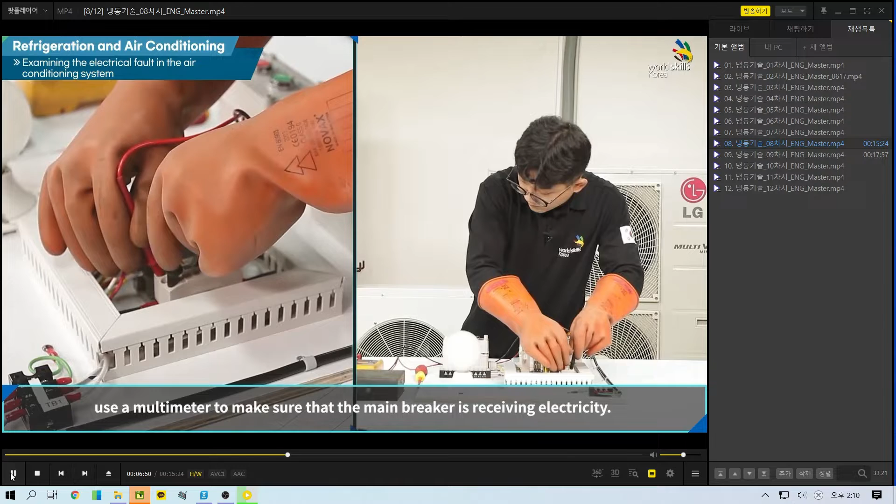Check if there's any electrical leakage at the inner part of the circuit and if ground connection is properly conducted. After confirming the electricity is flowing into the circuit, turn on the switch to examine how the circuit is operating. Due to the electrical flow inside the circuit, the equipment must be checked with rubber insulation gloves for the safety of the operator.

Check whether the power and operation lamps properly work and the light bulb for loading on behalf of the motor is operating normally.

The process of finding and repairing the fault: disconnect the power from the main electrical circuit and cut the wires intentionally to open the circuit, causing a failure. At the part where the worker has just cut the wires, the failure is caused by disconnecting the wire that is connected to the magnetic switch.

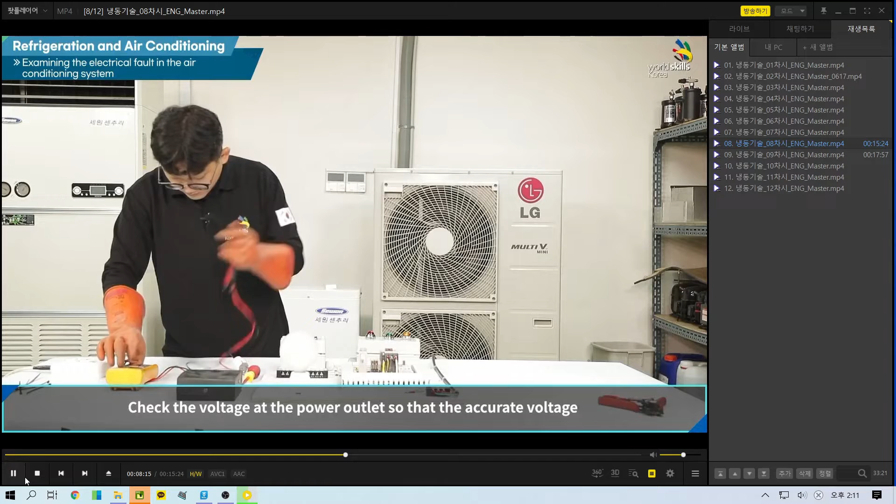To check if there occurs any fault in the machine, supply power to it again. When connecting the power, you must wear rubber insulated gloves and should conduct the power voltage test. Measure the voltage at the power outlet so that the accurate voltage can be supplied to the 220-volt line and 0-volt line on the diagram.

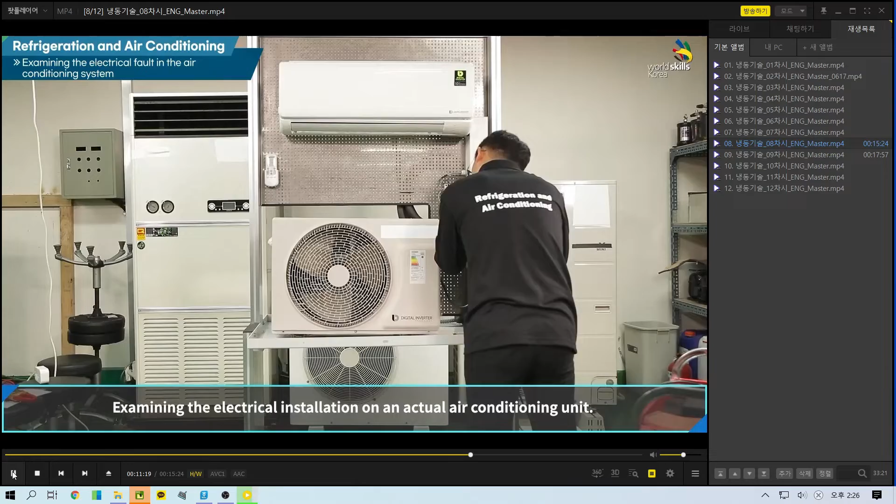For workers' safety, attach safety signs to the circuit breaker, power outlet, and other equipment to prevent outsiders from operating them randomly.

To check the diagram and the wiring of the air conditioning unit, disassemble some covers of the outdoor and indoor unit.

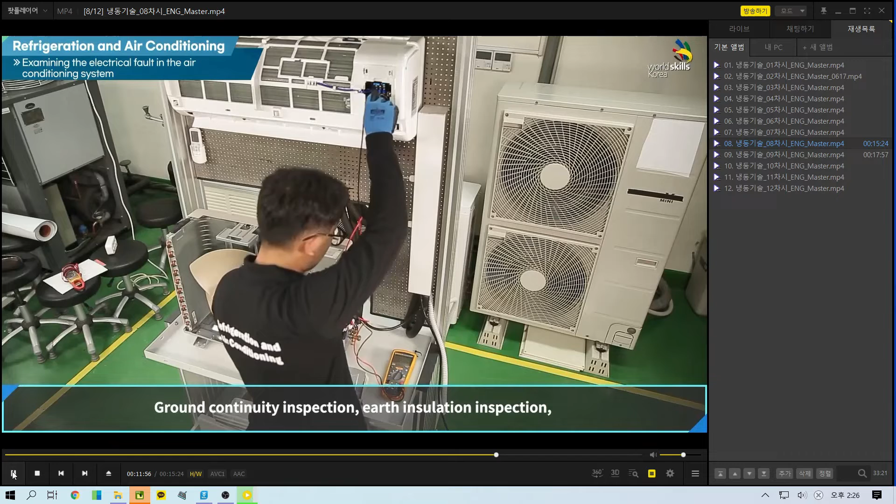Using a digital multimeter, conduct the continuity test on terminal L and N. Ground continuity inspection, earth insulation inspection, and interline insulation between L and N phases are conducted sequentially.

If the resistance value between the two terminals is abnormal, it can cause fire due to circuit breaker trip damage and electrical components breakage or sparks. Therefore, check for any problems before supplying power.

The actual air conditioning unit consists of an outdoor and indoor unit, so there is also a communication wire connecting the two. Be sure to inspect not only the main wire of the machine, but also the communication wire.

The refrigeration unit usually consists of several basic control circuits that are operated by their own sequence, which operates following the whole sequence again.

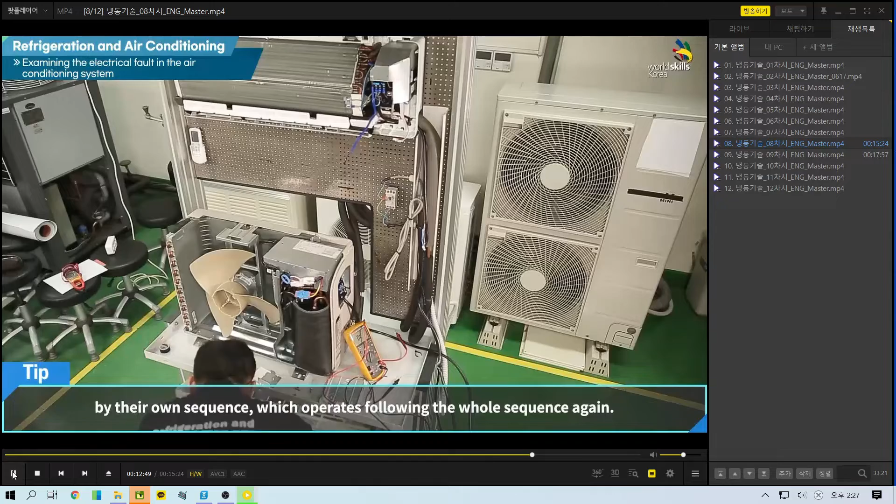What is a sequential control? It is a control system which proceeds step by step according to a set sequence. If power is supplied with a switch, it operates the load according to the conditions of the auxiliary relay in the circuit or the switch.

If the circuit test is completed, put the covers on the machine again and supply power.

Control systems for refrigeration systems and air conditioners are divided into main and auxiliary circuits. If you conduct the design and wiring by distinguishing each circuit part and control part, they can easily find the fault when the control system of the refrigeration unit has any problem, and accurately conduct the repair by exchanging proper components. The actual wiring diagram might use a different operation method and components depending on the designer's intention and purpose. So be sure to understand the control system by checking the wiring diagram provided by the manufacturer.

Before supplying power, make sure to conduct the power voltage test so that the accurate voltage can be provided.

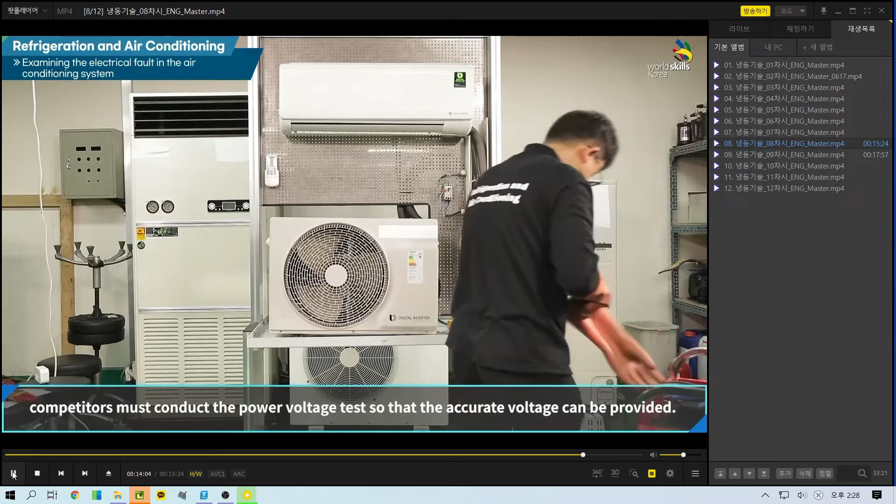Connect the power to the air conditioning unit and operate it to check if it works without any problems.

Main focus of the task in this training is as follows. First, to reduce errors in data, examine the problem with several trials instead of finishing it with a single trial. Second, testing instruments such as digital thermometer must measure the same points during both normal operation and fault finding. Third, when measuring wind speed, it is necessary to measure the wind volume at several places as much as possible, rather than only one place, and to make an average value.

Fourth, when installing a manifold gauge, install it where the refrigerant in the hose can be reclaimed. Fifth, after the repair is completed, competitors should always check if the machine operates properly. Sixth, to figure out the reason for the fault, it is necessary to train workers by comparing the normal refrigeration cycle and the refrigeration cycle which has a mechanical fault. Please check the preparations and tools for this training.

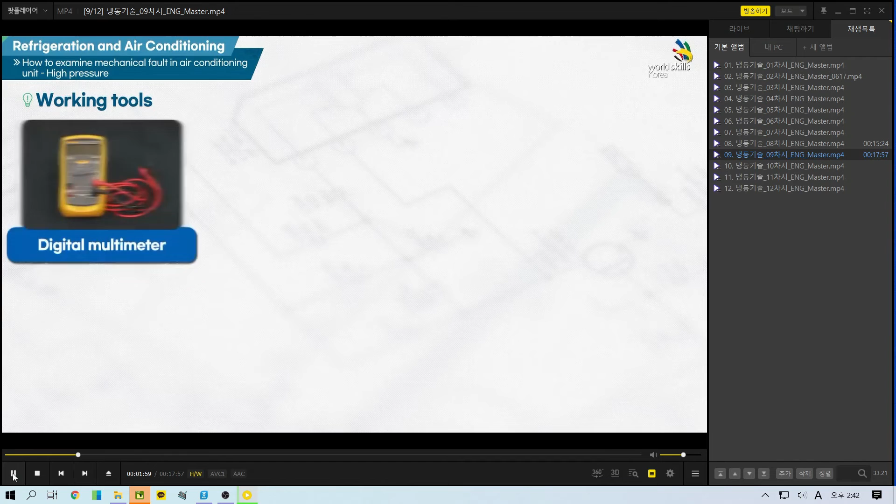These are precautions. First, before repairing the fault, competitors should attach a danger sign at the end of the power cord. Second, since this work deals with the refrigerant, make sure to wear safety gear to prevent low temperature burns.

Third, the sensor for temperature measurement should be attached to the exact position. Fourth, before using measuring equipment such as a thermometer and a manifold gauge, make sure to adjust it to zero. Fifth, when supplying power, make sure to wear insulated gloves.

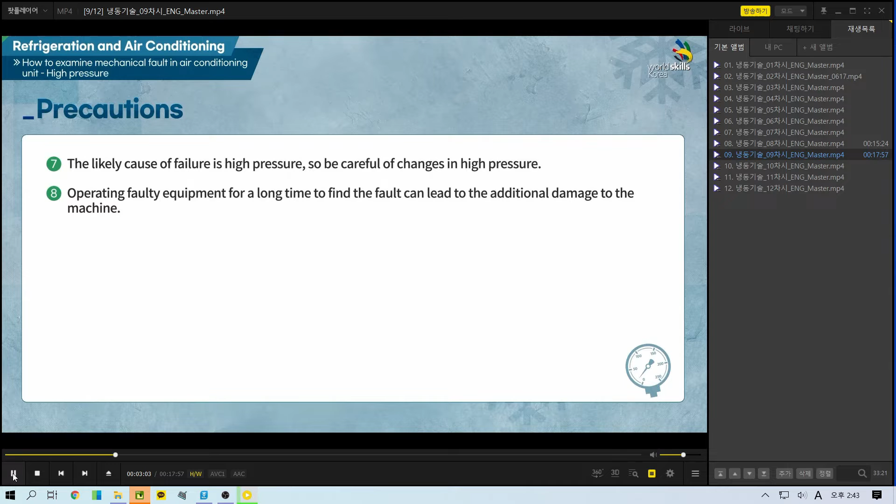Sixth, before and after supplying power, make sure to conduct the electrical short test and insulation test. Seventh, the likely cause of failure is high pressure, so be careful of changes in high pressure. Eighth, operating faulty equipment for a long time to find the fault can lead to additional damage to the machine. Ninth, care must be taken in insulating the sensor parts so that the temperature measurement data values are not affected by external factors.

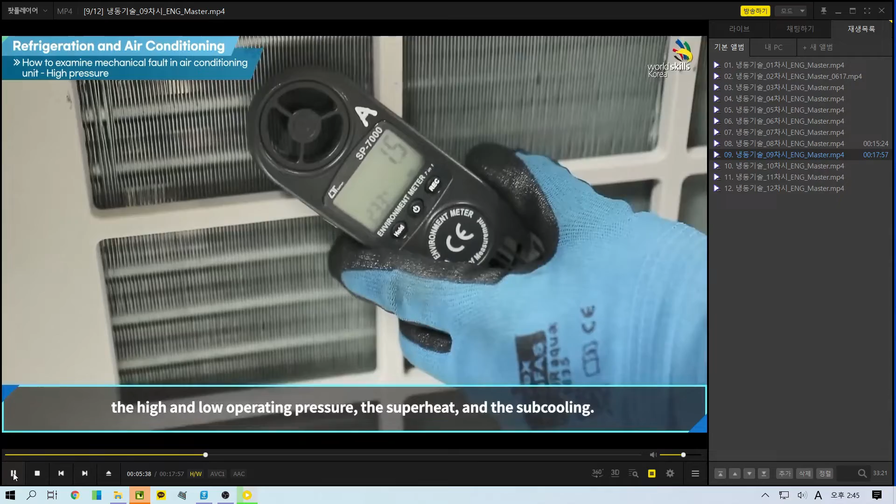When measuring the air velocity of indoor or outdoor unit, divide the inlet or outlet into four to six sections, and measure the air velocity in each divided section to get an averaged value. If you multiply the average value with the area of the indoor unit, you can get the air volume of the machine.

The situation of the fault regarding the decreased air volume in condenser. Put a paper over the outdoor unit to intentionally decrease the air volume of the condenser. Check how the data gets changed compared to the data from the normal machine.

There can be several reasons for the decreased air volume of the outdoor unit, but it commonly experiences an abnormal increase in the discharge pressure, which is a high pressure part. Reasons for the decreased air volume of the outdoor unit:

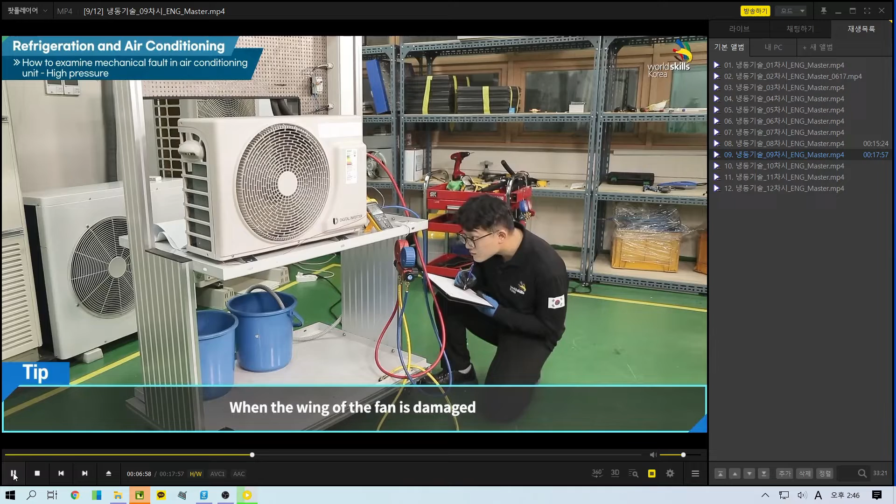When the motor does not rotate properly because of a functional problem in the motor. When the wing of the fan is damaged. When the fins on the suction side of the outdoor unit are clogged with foreign substances. When the outdoor unit is placed in a problematic location.

Measure the compressor operating current. High pressure rises due to a lack of heat exchange, causing the compressor operating current to rise as well.

If the place where the condenser is installed is not ventilated and has a lot of dust, the contaminants will stick to the refrigerant pipe and cooling fin. In this case, the heat does not exchange, rising the high pressure.

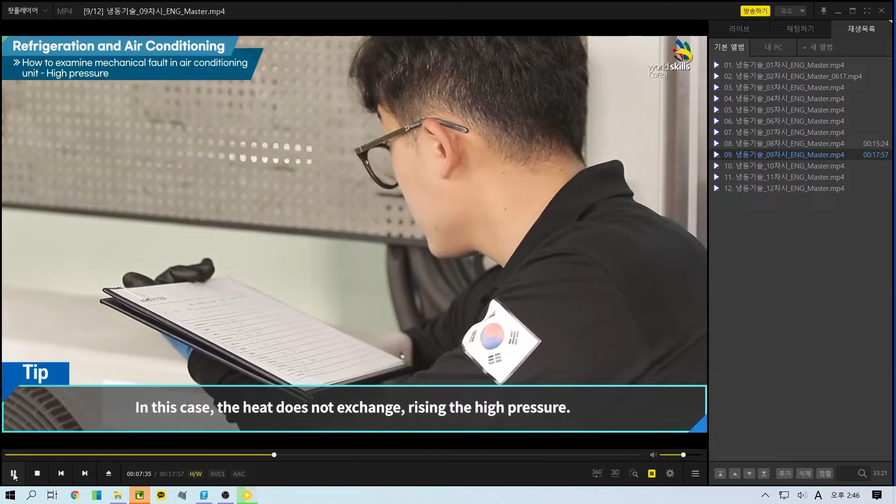If a leaf or a paper is stuck to the condenser, the heat does not exchange as well. As a result, condensation will not take place well, but the pressure at the high pressure part will increase.

Let's compare the data of when the air volume of condenser is decreased with when the condenser is operating normally. Check for any noticeable changes: increase in discharge pressure, increase in compressor operating current, decrease in air volume of condenser, no change in the degree of supercooling of the condenser, no change in the degree of superheat of the evaporator.

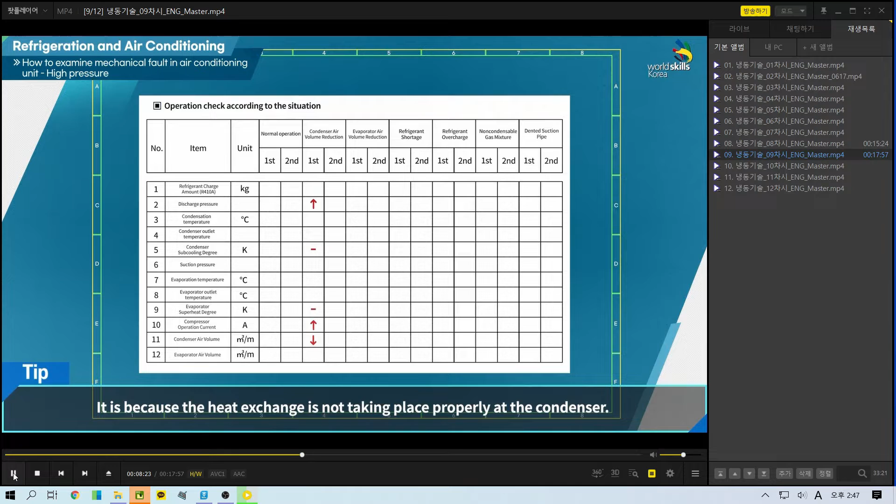The reason for the data change is because the heat exchange is not taking place properly at the condenser. The condensing medium of an air-cooled condenser is the air that exchanges heat. If the air volume is not adequate, the condensing efficiency decreases and the discharge pressure increases.

If the condenser is placed close to a wall or any other obstacle, the hot air discharged after the heat exchange gets sucked in again, making the heat exchange ineffective.

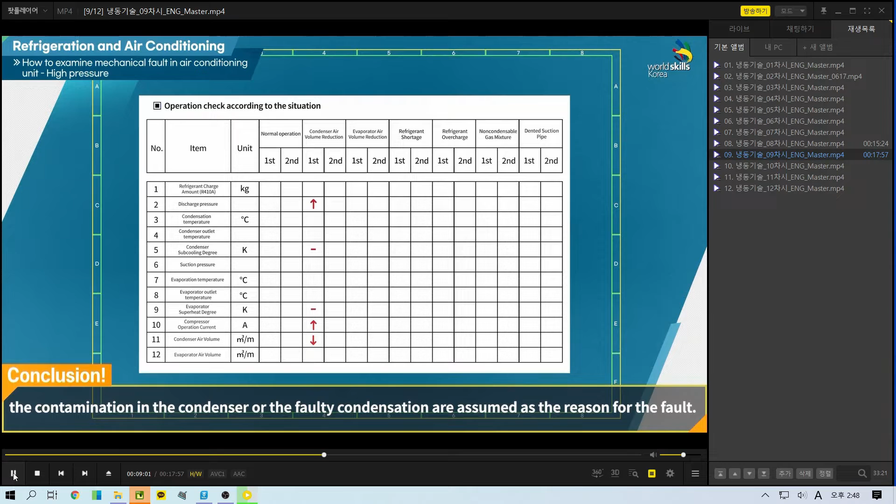When there occurs symptoms such as the increase in discharge pressure, the increase in operating current, and the decrease in the air volume of condenser, the contamination in the condenser or the faulty condensation are assumed as the reason for the fault. In this case, there is no change in the degree of supercooling of the condenser and the degree of superheat of the evaporator.

The situation of the fault regarding refrigerant overcharging. Overcharging the refrigeration system with refrigerant intentionally makes the machine dysfunctional. The overcharged amount of refrigerant is 600 grams.

Check how the data gets changed compared to the data from the normal machine. Measure the discharge pressure and the suction pressure during operation. If the refrigerant is overcharged in a refrigeration cycle, the discharge pressure gets abnormally high.

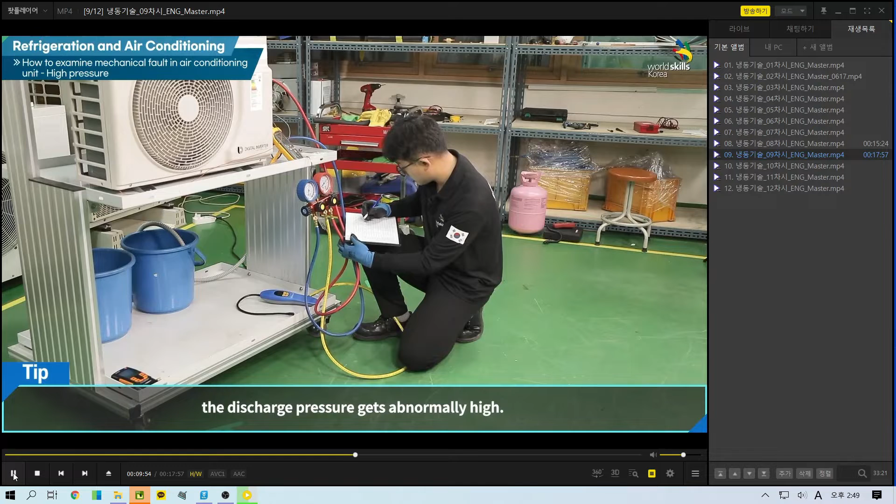Measure the temperature of the condenser outlet. Although the temperature dropped only a little bit, the degree of supercooling changes considerably due to the change in discharge pressure. Measure the compressor operating current.

The operating current is higher than normal.

Let's compare the data of when refrigerant is overcharged with when the machine operates normally. Check for any noticeable changes.

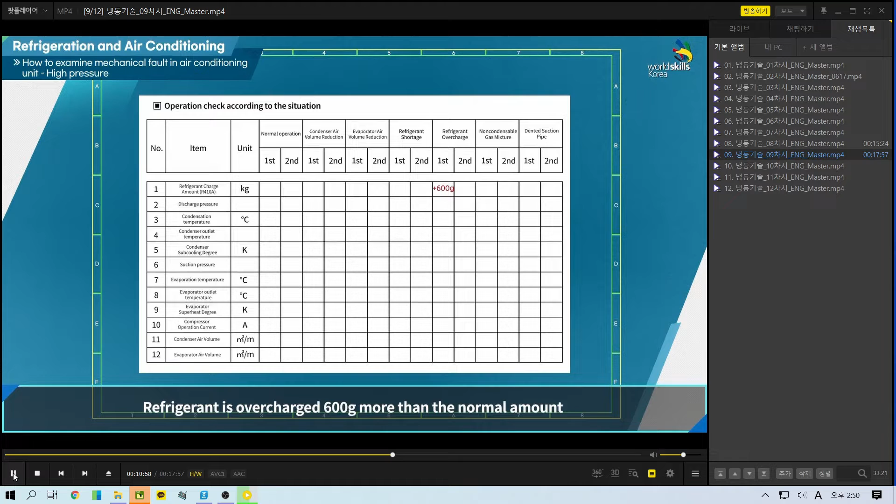Refrigerant is overcharged 600 grams more than the normal amount. This results in an increase in discharge pressure, an increase in the degree of supercooling of the condenser, a decrease in superheat of the evaporator, and an increase in compressor operating current, while the air volume of the condenser remains normal.

It is because of the excessive amount of liquid refrigerant that has accumulated on the condenser, decreasing the capacity of the condenser. The part of the condenser where the liquid refrigerant is filled cannot work properly as a condenser. Therefore, when the subcooling increases excessively, the liquid refrigerant which was unable to be evaporated keeps flowing into the compressor.

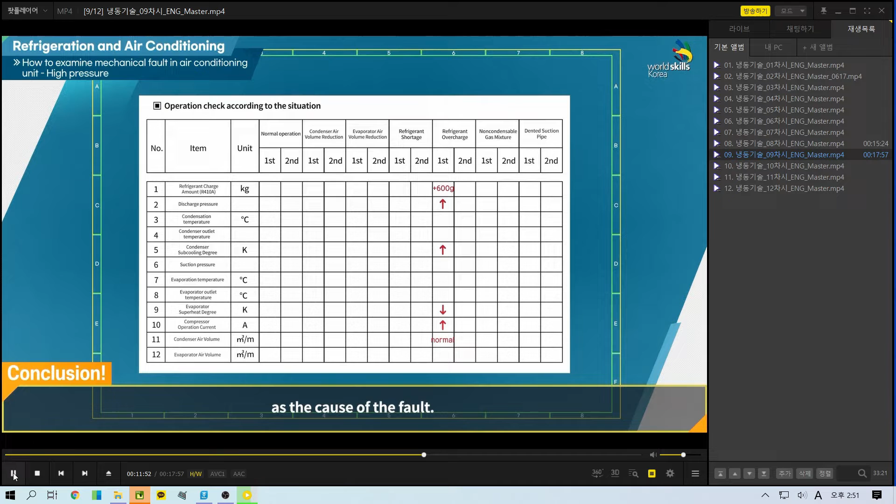When there occurs symptoms such as the increase in discharge pressure, the increase in subcooling of the condenser, the decrease in superheat of the evaporator, and the increase in compressor operating current, refrigerant overcharging is assumed as the cause of the fault. In this case, there is no change in the air volume of the condenser.

The situation of the fault regarding the mixed-in non-condensable gas. Inject some nitrogen gas into the refrigeration system intentionally to make it in a dysfunctional state.

When non-condensable gases such as air are collected in the condenser during piping, the condensation volume of the condenser is reduced due to the non-condensable gases, which results in higher discharge pressure than the pressure corresponding to the condensation temperature of the refrigerant vapor. Check how the data gets changed compared to the data from the normal machine.

While the machine is operating, measure the discharge pressure, the temperature of condenser outlet, the suction pressure, the temperature of evaporator outlet, the compressor operating current, and the air volume of both compressor and evaporator using a manifold gauge.

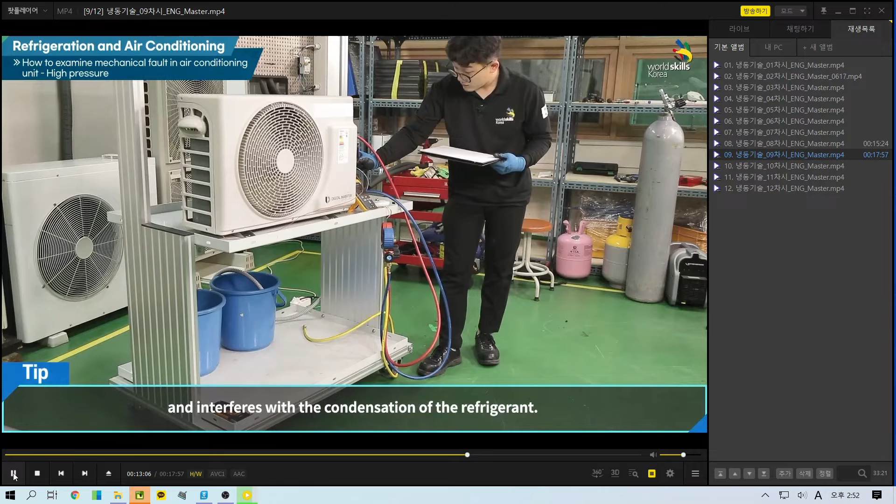Why can non-condensable gas cause problems? It is because non-condensable gas gathers at the upper part of the condenser and interferes with the condensation of the refrigerant. If the amount of non-condensable gas increases, the heat exchanging area decreases, hindering the heat exchange efficiency and the condenser's performance.

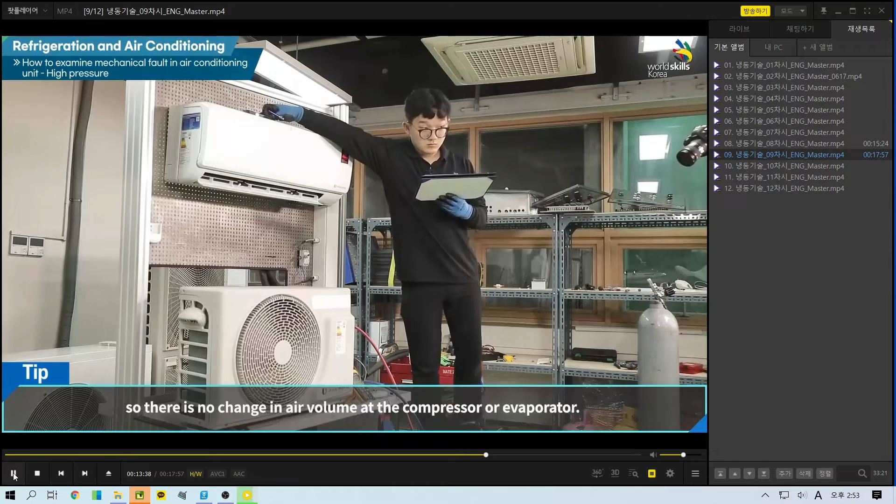Therefore, it can be the cause of decreasing the refrigerating ability since it increases the condensing pressure, increasing the shaft power of the compressor as well. However, there is no obstruction at the part where the wind goes out, so there is no change in air volume at the compressor or evaporator.

Let's compare the data of when some non-condensable gas is mixed in with when the machine is operating normally. Check for any noticeable changes.

There is an increase in discharge pressure, an increase in subcooling of the condenser, a suction pressure hunting phenomenon, an increase in superheat of the evaporator, and an increase in compressor operating current. There is no change in the air volume of the condenser.

To prevent non-condensable gases from being mixed in, seal the refrigerant piping system properly and make sure there is no remaining air or non-condensable gases by sufficiently conducting the evacuation procedure. When the refrigerant is being charged, be careful so that no air or moisture is mixed in.

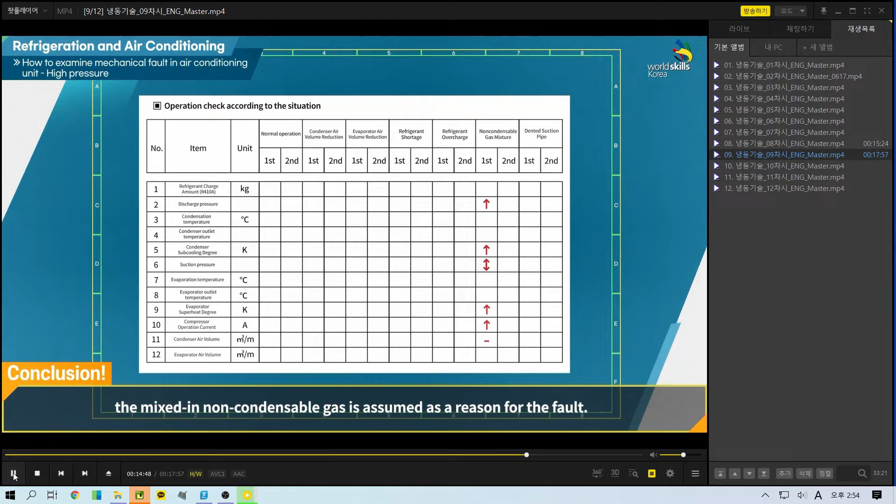When there occurs symptoms such as the increase in discharge pressure, the increase in subcooling of the condenser, the suction pressure hunting phenomenon, the increase in superheat of the evaporator, and the increase in compressor operating current, mixed-in non-condensable gas is assumed as the cause of the fault. In this case, there is no change in the air volume of the condenser.

After completing the task, the tools and measuring gauges used for examining and repairing the fault should be removed. All sorts of covers or caps that were disassembled, such as a pressure controller and joint box, should be reassembled to the original state.

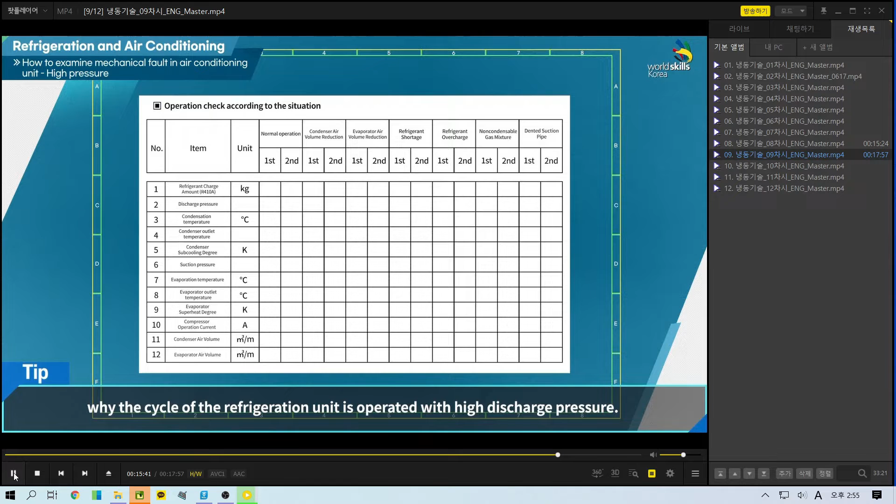We have reviewed three reasons the cycle of the refrigeration unit is operated with high discharge pressure. There are three main reasons why the cycle of the refrigeration unit is operated with high discharge pressure: decreased air volume of the condenser, refrigerant overcharging, and mixed-in non-condensable gas.

These show differences in the measured data depending on the three reasons above. If the condenser air volume decrease is the cause, it shows problems such as an increase in discharge pressure, an increase in compressor operating current, and a decrease in air volume of the condenser, with no change in the degree of supercooling of the condenser and no change in the degree of superheat of the evaporator.

When the refrigerant is overcharged: increase in discharge pressure, increase in subcooling of the condenser, decrease in superheat of the evaporator, increase in compressor operating current, but the air volume of the condenser is normal. When some non-condensable gas is mixed in: increase in discharge pressure, increase in subcooling of the condenser, suction pressure hunting phenomenon, increase in superheat of the evaporator, increase in compressor operating current, and no change in the air volume of the condenser.

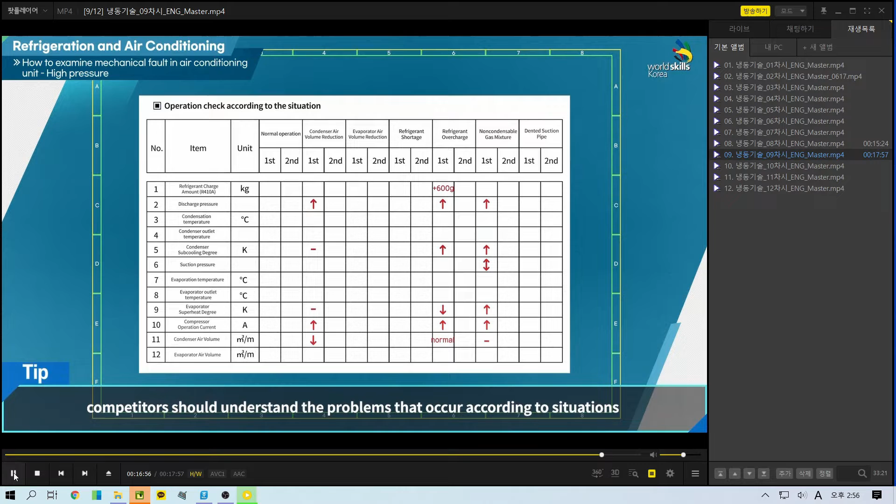Even if the discharge pressure is high, there can be a difference in the specific data depending on the situation. In order to quickly find the fault and its reason, it is necessary to understand the problems that occur according to situations and to be trained repeatedly by comparing the difference in the measured data.

After checking the data sheet on the video screen, I'm going to give you additional explanation on it. As you can see in the table, the first part of the data sheet is about the normal operating conditions, and it is going to be measured 2 times.

I recommend following the procedure from the left section to the right section. Before dividing the faults depending on the high pressure change or the low pressure change, during training I recommend following this order.

The first 2 sections are about the evaporator and the condenser part, the air volume shortage faults. These are simple since you just need to attach and remove paper to cause the fault.

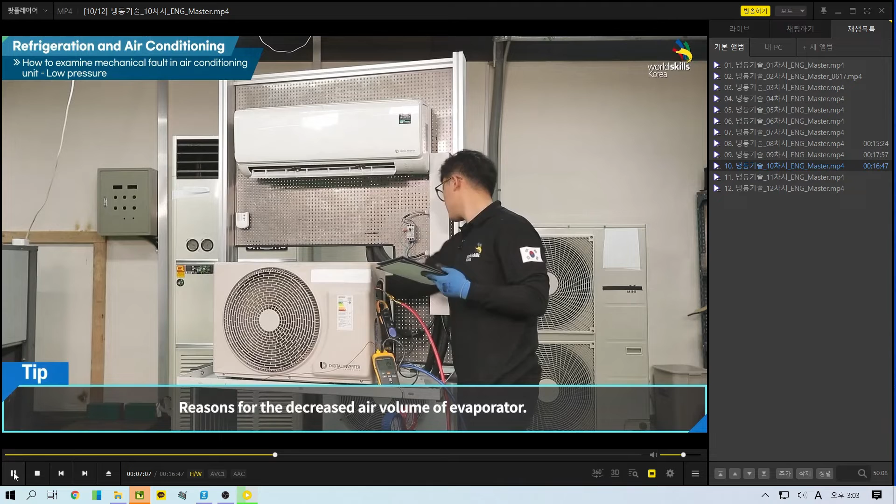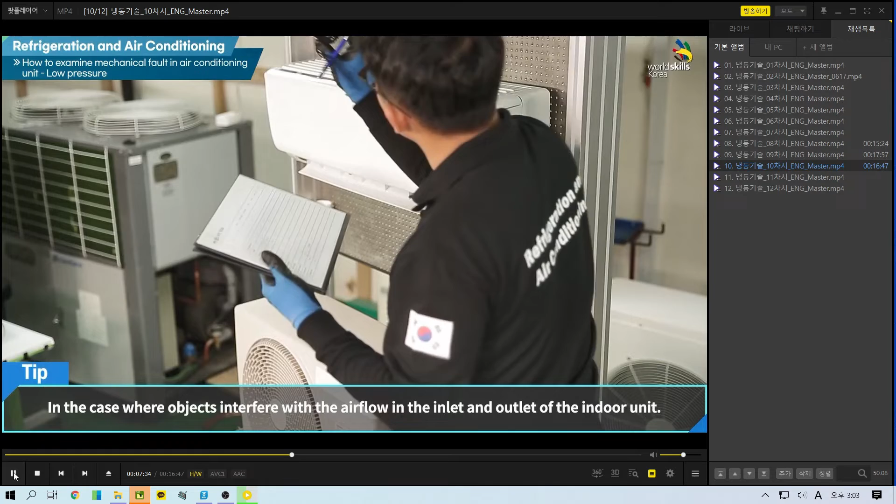There are many reasons that reduce the air volume of evaporator. First, there is a case where the air filter or evaporator on the suction side of the indoor unit has foreign substances or dust, decreasing the air volume. In addition, there is a case where the evaporator is not operating in normal RPM because of the broken motor. There is a case where the wing of the fan is broken. And there is a case where objects interfere with the airflow in the inlet and outlet of the indoor unit.

Therefore, when the evaporator is experiencing decreased air volume, make sure to measure the air volume. Let's compare the data of when the evaporator is experiencing the decreased air volume with when the machine is operating normally. Let's check for any noticeable changes.

Decrease in suction pressure. Decrease in superheat of evaporator. Decrease in air volume of evaporator. Decrease in subcooling of condensers. Decrease in operating current. The reason for the data change is because the heat exchange is not taking place properly.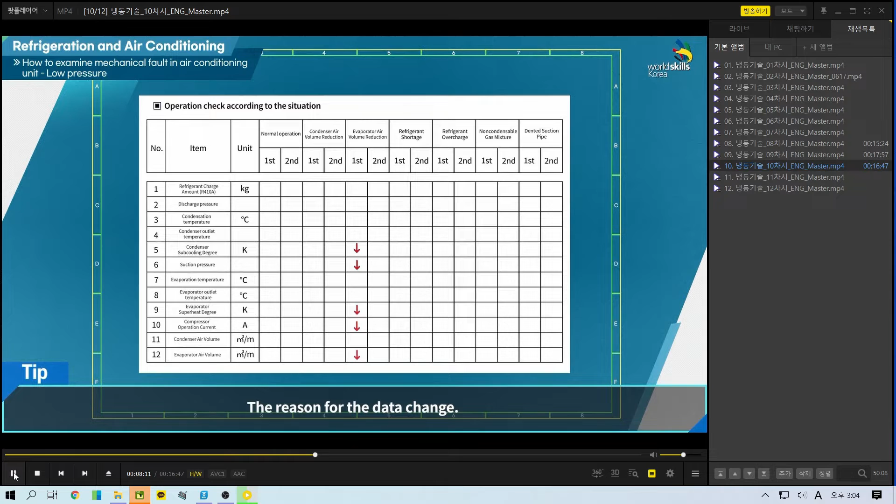At the indoor unit. Therefore, make sure to conduct overhauls and maintenance on the machine thoroughly to prevent the blockage in air filter and the contamination in refrigerant pipe and cooling fin of the evaporator, and to make evaporator fans.

Operate properly. When there occur the symptoms such as the decrease in suction pressure, the decrease in superheat of evaporator, and the decrease in air volume of evaporator, the faulty heat exchange of the evaporator is assumed to be the reason for the fault.

This is a malfunction due to insufficient refrigerant. Reclaim the refrigerant from the refrigeration system intentionally to make it in a dysfunctional state.

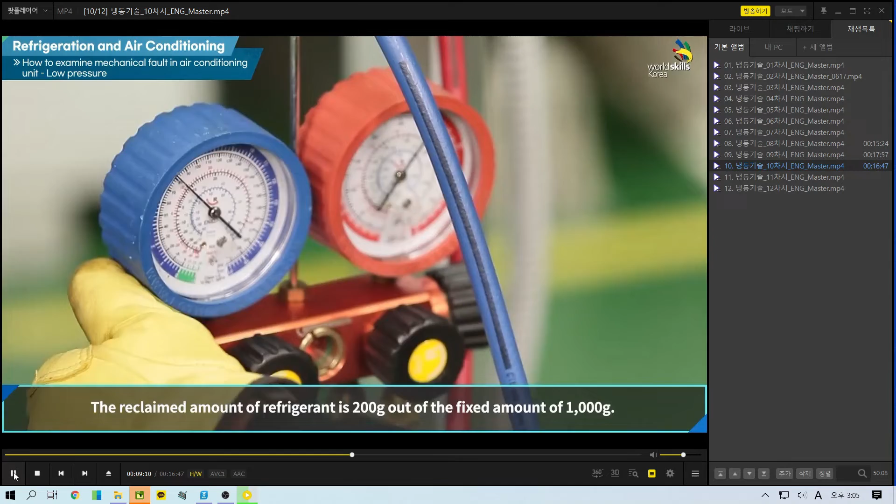The reclaimed amount of refrigerant is 200 grams out of the fixed amount of 1,000 grams. Check how the data gets changed compared to the data from the normal operation.

Measure the compressor operating current, the temperature of evaporator outlet, the temperature of condenser outlet, the high and low operating pressure.

Insufficient refrigerant may result in a decrease in both suction and discharge pressure. In addition, the increasing superheating degree of the system causes compressor failure due to overheating and deterioration of the freezing capacity. Measure and record the air velocity of the indoor and outdoor units.

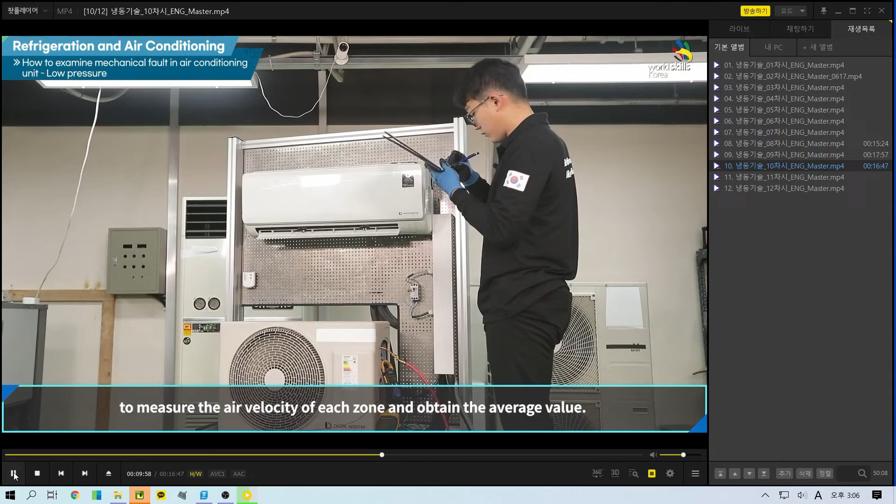When measuring air velocity, the air inlet or outlet of the indoor and outdoor units shall be divided into 4 to 6 equal parts to measure the air velocity of each zone and obtain the average value.

Let's compare the actual value of when there is a lack of refrigerant with when the machine operates normally. Check for any noticeable changes. The reclaimed amount of refrigerant is 200 grams.

Decrease in discharge pressure. Decrease in subcooling of condenser. Decrease in suction pressure. Increase in superheat of evaporator. Decrease in compressor operating current.

When there is a lack of refrigerant of refrigeration equipment as well as measured data, if a sight glass is installed, bubbles are visible in the liquid refrigerant.

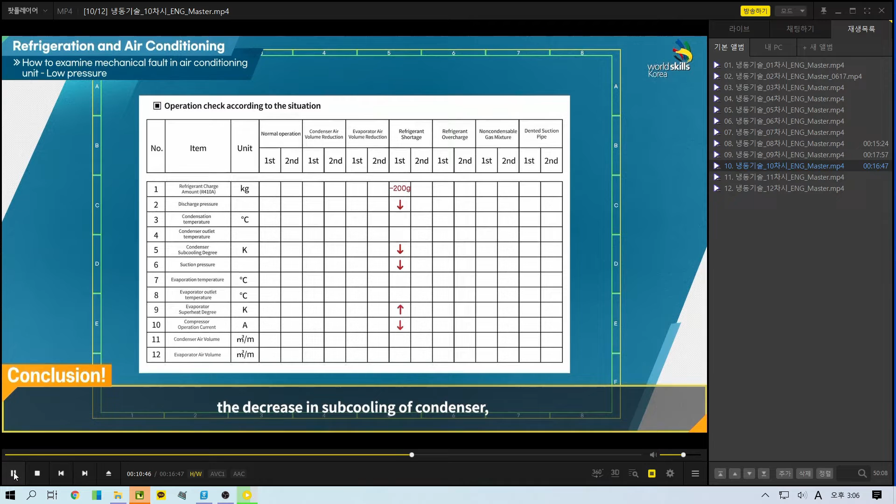Therefore, when there occurs the symptoms such as the decrease in discharge pressure, the decrease in subcooling of condenser, the decrease in suction pressure, the increase in superheat of evaporator, and the decrease in compressor operating current, the lack of refrigerant is estimated to be a reason for the fault.

This is the situation where the pipe is dented. Distort the pipe of the refrigeration equipment intentionally to make it in an abnormal dysfunctional state where the refrigerant flow is hindered.

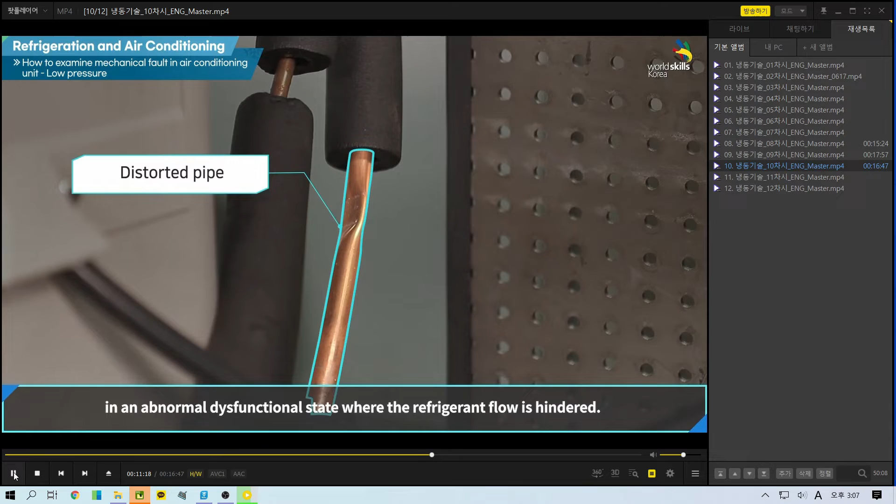Check how the data gets changed compared to the data from the normal machine. Measure discharge pressure and suction pressure during operation.

If the refrigeration circulation is hindered, only a small portion of the refrigerant goes through the evaporator, resulting in lower suction pressure.

Measure the temperature of evaporator outlet and the temperature of condenser outlet.

When the filter dryer in the liquid tube is blocked, the outlet temperature is lower than the inlet temperature due to the difference in pressure between the inlet and outlet of the filter dryer. Similar problems occur when the liquid line is blocked or bent.

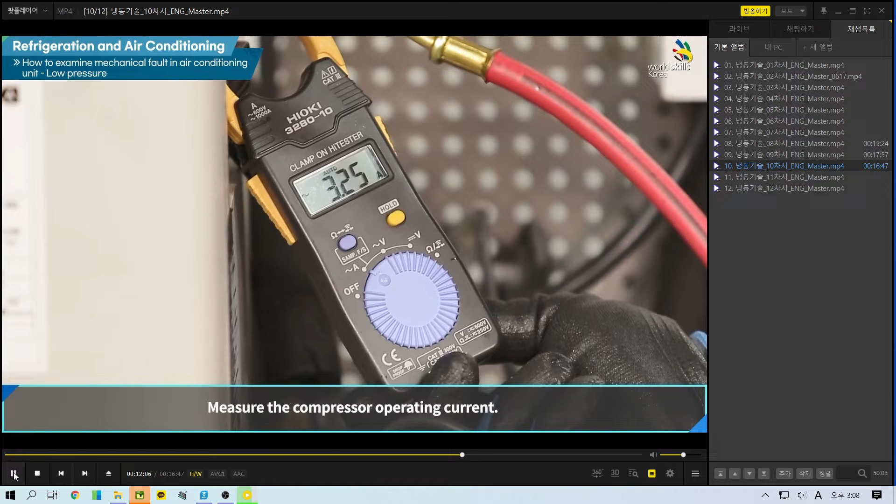Measure the compressor operating current. If the refrigerant does not flow smoothly, the pressure at the low pressure part gets low. It causes the low pressure controller to operate, which stops the refrigeration equipment.

Measure and write down the air velocity of indoor and outdoor unit. When measuring the air velocity, divide the air conditioning unit into 4 to 6 sections to measure each section and calculate the average value.

Let's compare the data of when the pipe is dented with when the machine operates normally. Check for any noticeable changes.

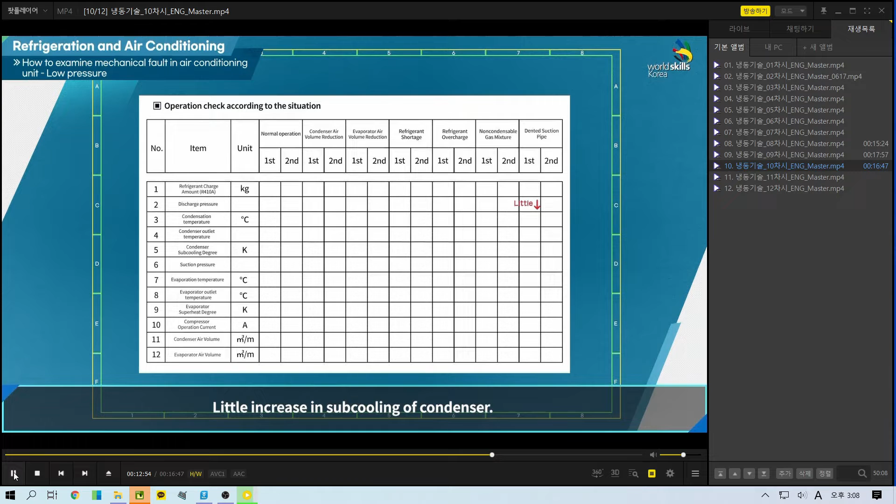There is a little decrease in discharge pressure, a little increase in subcooling of the condenser, a decrease in suction pressure, and an increase in superheat of the evaporator.

The reason for the data change is because the refrigerant circulation is hindered. Only a small portion of the refrigerant circulates, resulting in lower suction pressure. The superheating changes as the evaporation process becomes shorter and the suction pressure decreases.

Therefore, when there occur problems such as a little decrease in discharge pressure, a little increase in subcooling of the condenser, a decrease in suction pressure, and an increase in superheat of the evaporator, the dented pipe is estimated to be a reason for the fault.

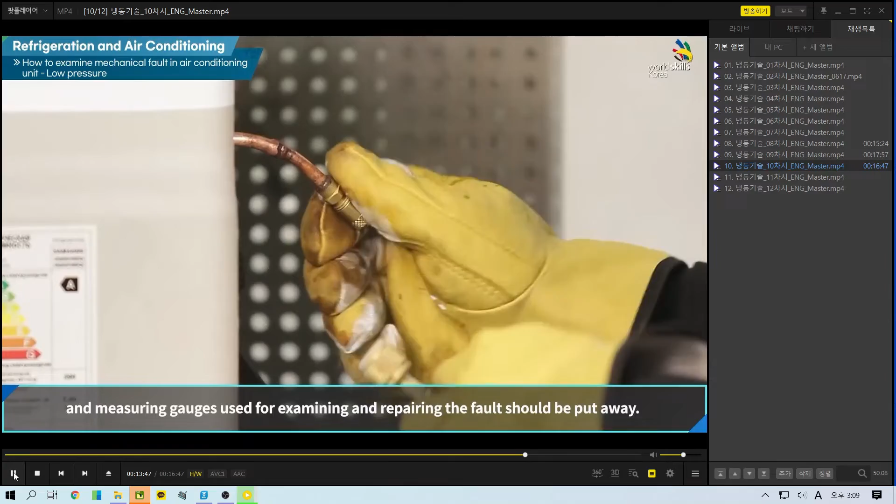After completing the task, the tools and measuring gauges used for examining and repairing the fault should be put away. All sorts of covers or caps that were disassembled, such as a pressure controller and joint box, should be reassembled to the original state.

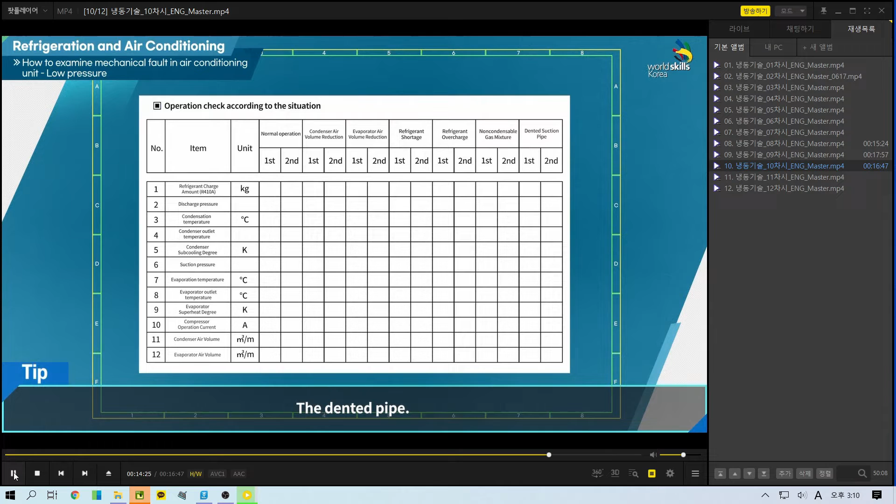We have reviewed 3 causes of failure operated under low suction pressure up to now. The reasons why the suction pressure in a refrigeration unit gets lower come from failures of piping, such as decreased air volume in the evaporator, a lack of refrigerant, or the dented pipe. In addition, there may be several other causes such as valve lock, expansion valve lock, or failure.

These are differences in the measured data depending on the 3 reasons above. When the decrease in air volume of the evaporator is the reason, symptoms such as decrease in suction pressure, decrease in superheat of the evaporator, and decrease in air volume of the evaporator may appear.

When the lack of refrigerant is the cause, symptoms such as decrease in discharge pressure, increase in discharge gas temperature, decrease in subcooling of the condenser, decrease in suction pressure, increase in superheat of the evaporator, and decrease in compressor operating current may appear.

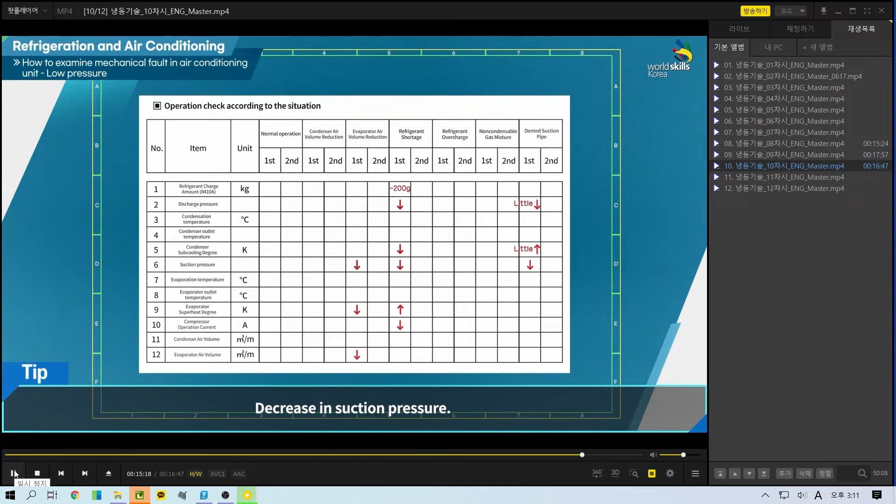When the defective piping system, such as a dented pipe, is the cause, symptoms such as a little decrease in discharge pressure and a little increase in subcooling due to changes in condenser pressure, decrease in suction pressure, and increase in superheat of the evaporator may appear.

Even if the suction pressure is low, there can be a difference in the specific data depending on the situation. In order to quickly find the fault and its reason, it is necessary to understand the problems that occur according to situations and to be trained repeatedly by comparing the difference in the measured data.

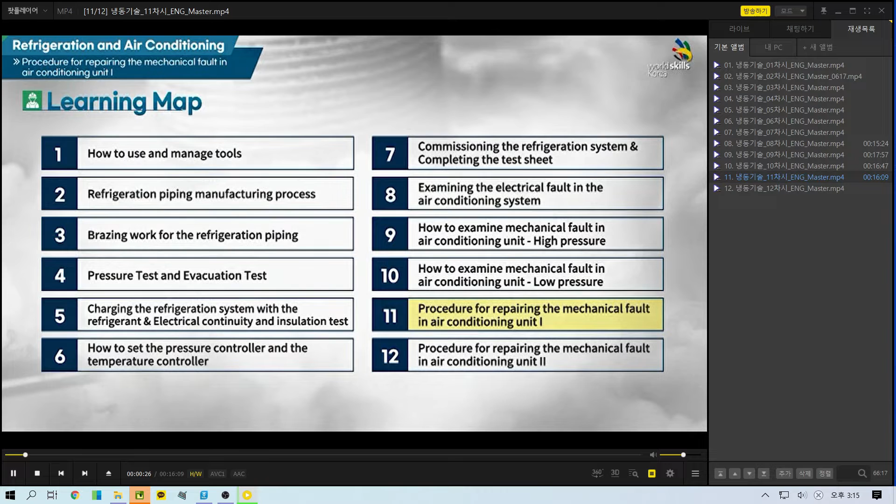The main focus of the task in this training is as follows. First, before brazing the pipe for the repair, you should be able to reclaim the refrigerant charged into the machine. Second, before reclaiming the refrigerant, you should be able to conduct the evacuation procedure on the refrigerant recovery machine.

Third, you should be able to understand how to connect the manifold gauge to the machine. Fourth, you should be able to understand how to connect and use the refrigerant recovery machine. Fifth, you should be able to understand the procedure for reclaiming the refrigerant.

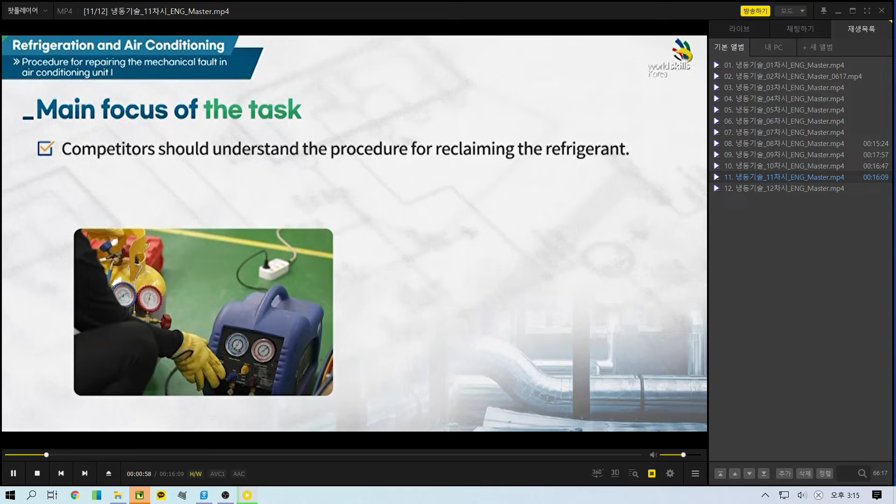Sixth, the weight of the reclaimed refrigerant should be measured. Seventh, the leakage test should be conducted in all connecting parts before, during, and after the refrigerant recovery. Eighth, brazing should be made according to the brazing standards.

Ninth, when brazing the pipe, the brazed face should be even, and over 2/3 of the deposited metal should be penetrated into the sufficiently expanded connection part. 10th, the leakage test of the oxygen welder should be conducted before brazing.

11th, when igniting the flame, be careful not to cause any black smoke. 12th, you should be able to know how to control the intensity of the flame with a neutral flame. 13th, when the torch flame is strong, make sure the copper tube is not melted down.

Please check the preparations and tools for this training.

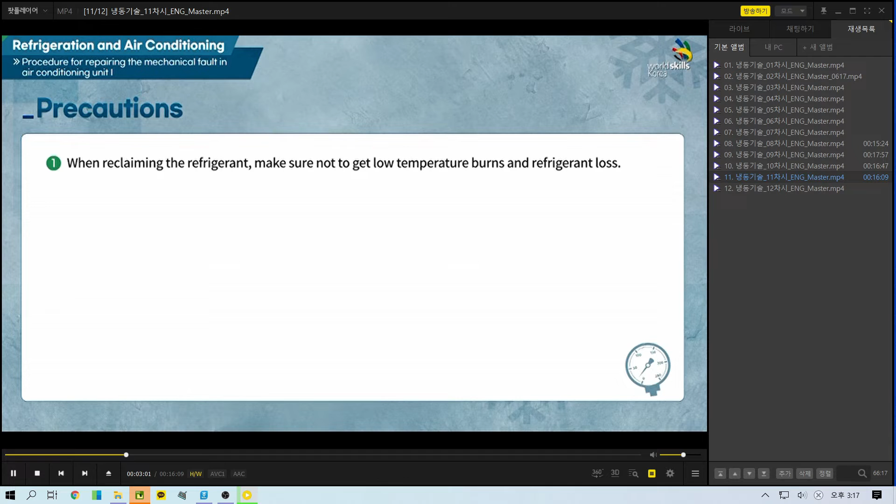These are precautions. First, when reclaiming the refrigerant, make sure not to get low temperature burns and refrigerant loss. Second, make sure to always wear personal safety gear such as safety goggles, long-sleeved clothes, and leather gloves.

Third, when using a brazing torch, be careful not to get burned by the fire. Fourth, when brazing, make sure to conduct the oxygen welder leakage test thoroughly to check if there is any sign of gas leakage. Fifth, when brazing, make sure the replacement component and the surrounding components are not damaged by the heat or fire.

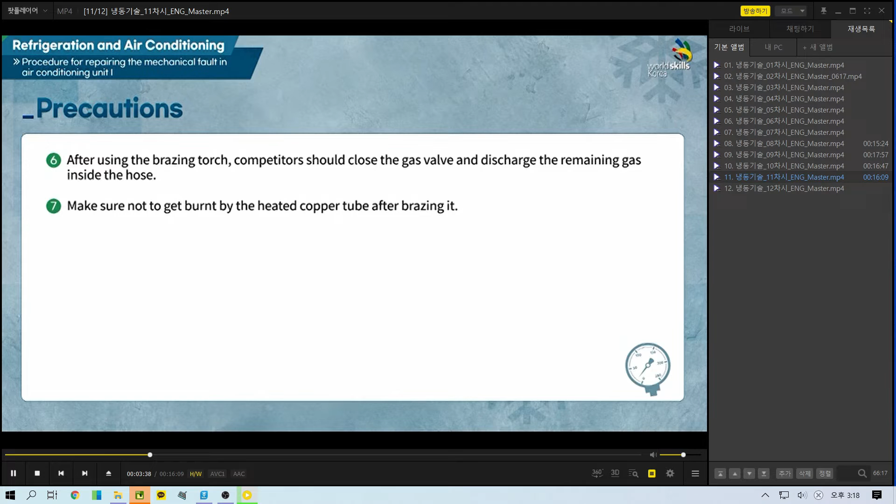Sixth, after using the brazing torch, make sure to close the gas valve and discharge the remaining gas inside the hose. Seventh, make sure not to get burnt by the heated copper tube after brazing it.

Eighth, conduct the leakage test on the replacement component by pressurizing nitrogen to check if there is any sign of leakage. Ninth, make sure to install the replacement component in the right direction.

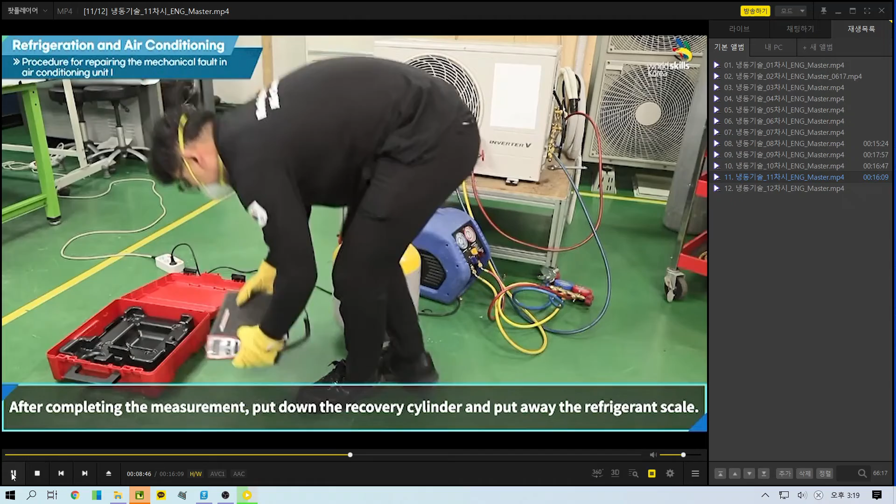This is to measure the amount of refrigerant recovered. After completing the measurement, put down the recovery cylinder and put away the refrigerant scale.

Before reclaiming the refrigerant from the refrigeration system, evacuate the refrigerant recovery machine, recovery cylinder, and the manifold gauge hose. The reason for evacuation work is to remove the non-condensing gas and moisture inside the recovery machine and the recovery container. Open all valves of the manifold gauge connected to the refrigerant recovery machine and the recovery cylinder.

Then operate the vacuum pump which is connected to the cylinder. It is possible to evacuate each equipment separately, but evacuating all at once reduces time.

After completing evacuation in accordance with the operating standards presented to the operator, close the valve of the recovery container connected to the vacuum pump. Then stop and remove the vacuum pump.

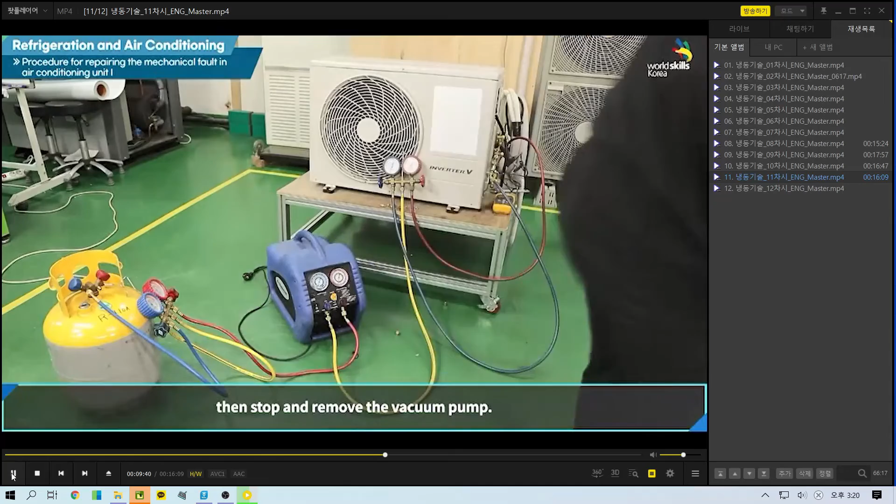If the refrigerant recovery machine and the recovery cylinder are evacuated separately, connect the low-pressure hose of the manifold gauge to the evacuated refrigerant recovery container and the refrigerant recovery machine sequentially. When the connection is completed, the non-condensing gas inside the manifold gauge hose should be purged before full refrigerant recovery.

Prepare refrigerant recovery by opening the high and low pressure valves of the refrigerator.

If the refrigerant is overcharged, the discharging pressure increases abnormally, causing the overcurrent relay or high pressure controller to operate and stop the refrigeration system. When the refrigerant is charged, make sure not to overcharge it to prevent this.

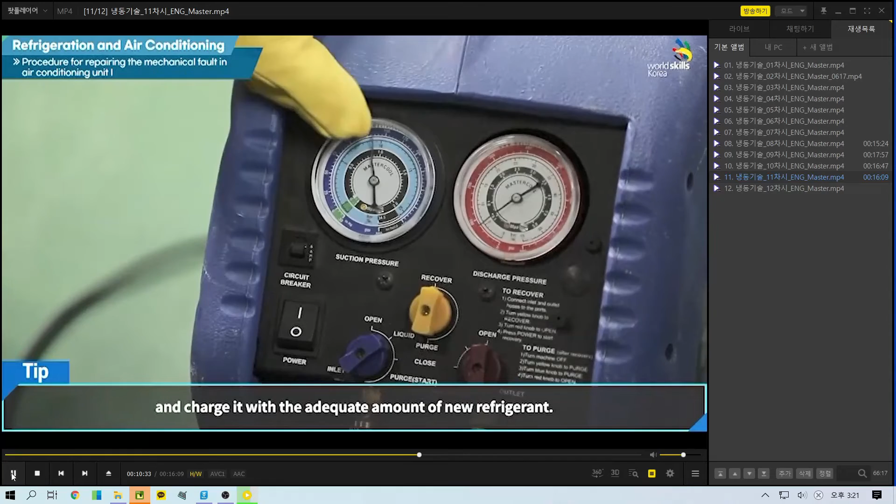If it has already been overcharged like this time, reclaim all refrigerant inside the refrigeration system and charge it with the adequate amount of new refrigerant.

Since the refrigerant is defined as an environmental pollutant, make sure to be especially attentive when dealing with it. Set the inlet switch to open and liquid according to the circumstances and retrieve refrigerant in the unit. The purge switch must be placed in the recover state and the outlet valve must be set to open to recover the refrigerant in the unit.

To recover the liquid refrigerant, first place the switch on the inlet side of the recovery device panel on liquid and open the high-pressure valve of the manifold gauge to recover the liquid refrigerant.

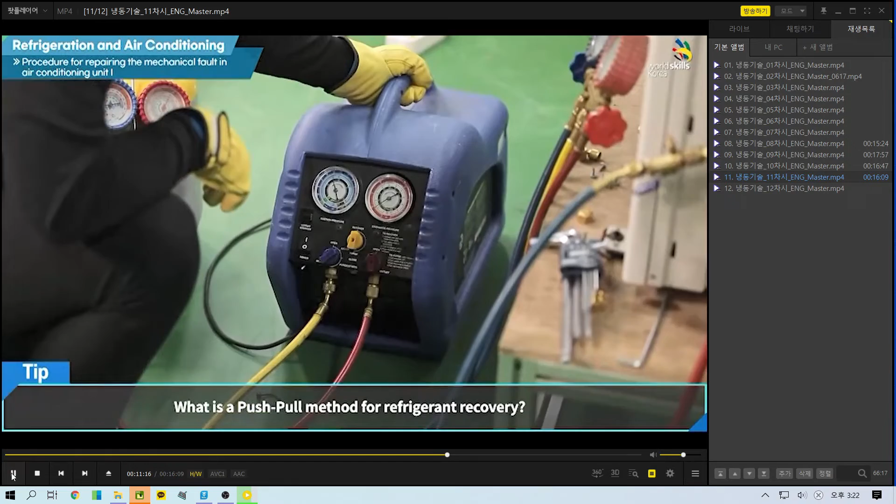What is the push-pull method of refrigerant recovery? The recovery machine inhales gas refrigerant from the recovery container to make high-pressure discharge gas, and the high-pressure gas pushes the liquid refrigerant from the refrigerator to the recovery container. So it quickly and safely recovers the liquid refrigerant from a large refrigerator. It also helps prevent the freezing of water-cooled refrigerators.

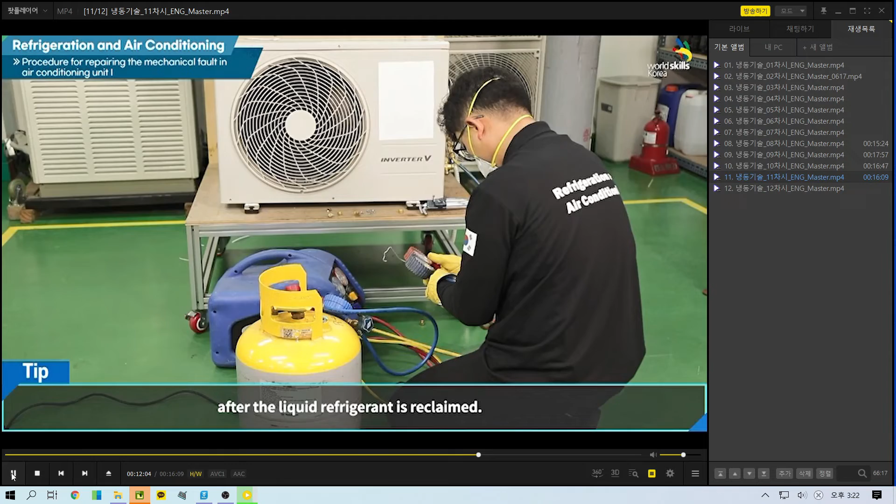When the liquid refrigerant is recovered, change the switch on the inlet of the recovery panel from liquid to open. The manifold gauge low-pressure side valve is also opened to simultaneously recover the high and low-pressure refrigerant of the refrigerator. The reason to reclaim the gas refrigerant after the liquid refrigerant is reclaimed is because it is the most effective and quickest way. The process of reclaiming the refrigerant only in vapor state takes a long time.

During the process of recovering refrigerant, check whether there is any gas leakage into the atmosphere with a gas detector. With a gas detector, you can conveniently detect even a small amount of leakage. If it is placed on a leaking part, the light or the alarm is activated. Check for leakage without leaving out the connection of the refrigerator, manifold gauge, and the connection between the recovery machine and the recovery container.

When recovering the liquid refrigerant, it is possible to work while looking at the sight glass. If the liquid refrigerant is no longer visible on the sight glass, the liquid refrigerant recovery is completed, so the remaining gas refrigerant is recovered afterward.

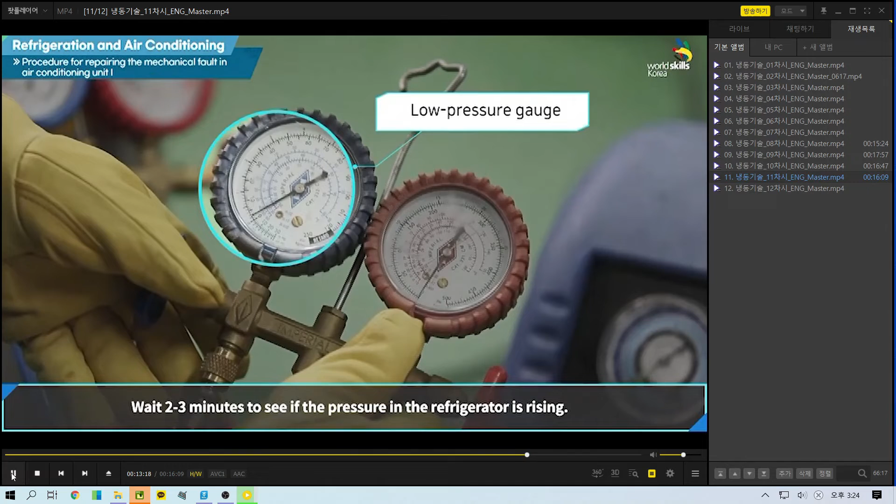After refrigerant recovery is completed, turn off the recovery machine and wait for a moment because the remaining refrigerant in the refrigerator can vaporize and cause the pressure to rise. Wait 2 to 3 minutes to see if the pressure in the refrigerator is rising. When the pressure in the refrigerator rises, operate the recovery machine again to recover all evaporated refrigerants. Repeat this task 2 to 3 times.

When the blue low-pressure gauge of the manifold gauge indicates 0, close all manifold gauge valves and stop the operation of the recovery machine.

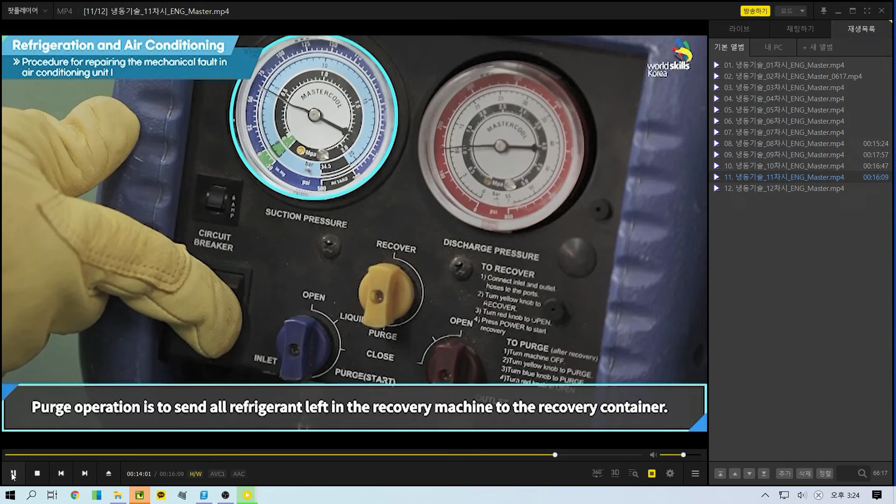Change the inlet switch on the recovery panel to purge. The low-pressure gauge attached to the recovery machine shows the value increasing from 0. Change the recovery switch of the recovery machine to purge. Purge operation sends all refrigerant left in the recovery machine to the recovery container. It can be seen that the low gauge level of the recovery machine is falling quickly.

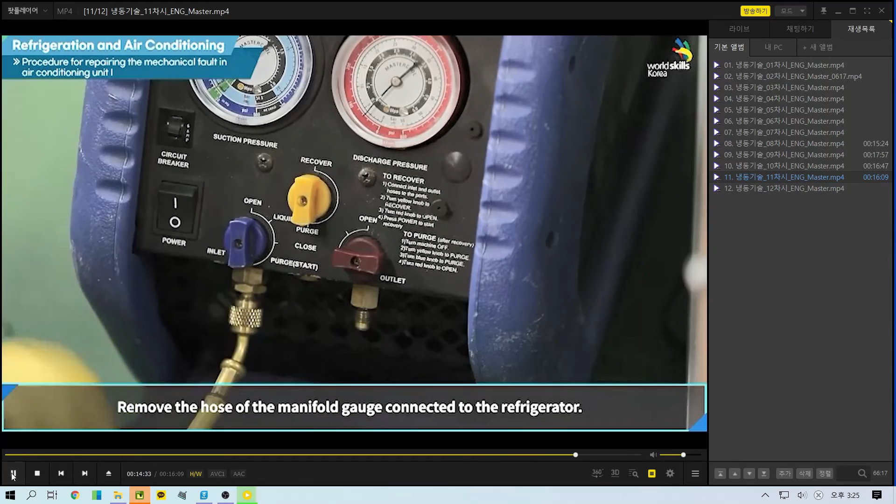After the purge is completed, close the valve of the manifold gauge connecting the recovery machine and cylinder. Lock the outlet switch of the recovery machine into close mode and close the main valve of the recovery cylinder as well. Remove the hose of the manifold gauge connected to the refrigerator. Since the purge operation has been completed, even if the hose is removed, the amount of refrigerant released into the atmosphere will be very small.

Using a refrigerant scale, measure the weight of the recovery cylinder, which has just reclaimed the refrigerant. If subtracting the weight of the empty cylinder from the measured weight, the total amount of the reclaimed refrigerant can be obtained. Attach a sticker that shows the amount of reclaimed refrigerant, refrigerant type, and the date. Cap the recovery cylinder and conduct the leakage test with a gas detector.

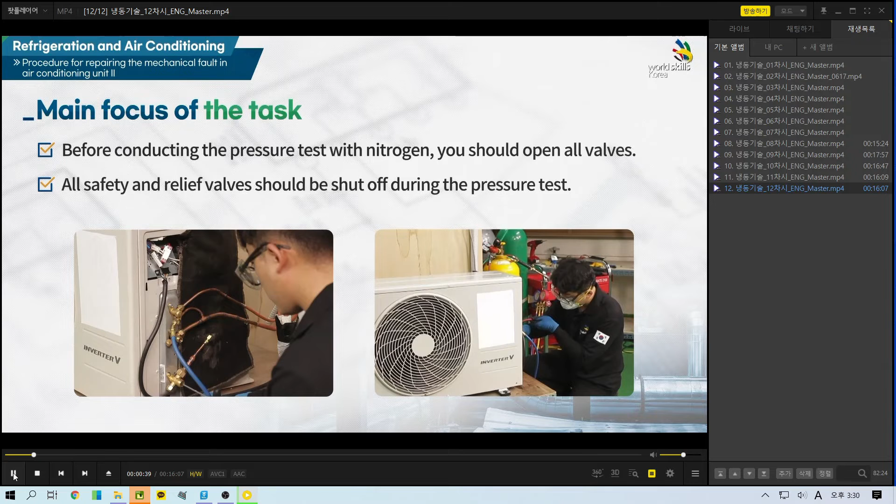Main focus of the task in this training is as follows. First, before conducting the pressure test with nitrogen, make sure to open all valves. Second, all safety and relief valves should be shut off during the pressure test. Third, during the pressure test, nitrogen should be pressurized safely up to the presented standard pressure to the worker. Fourth, before the evacuation, all sorts of service and solenoid valves should be opened.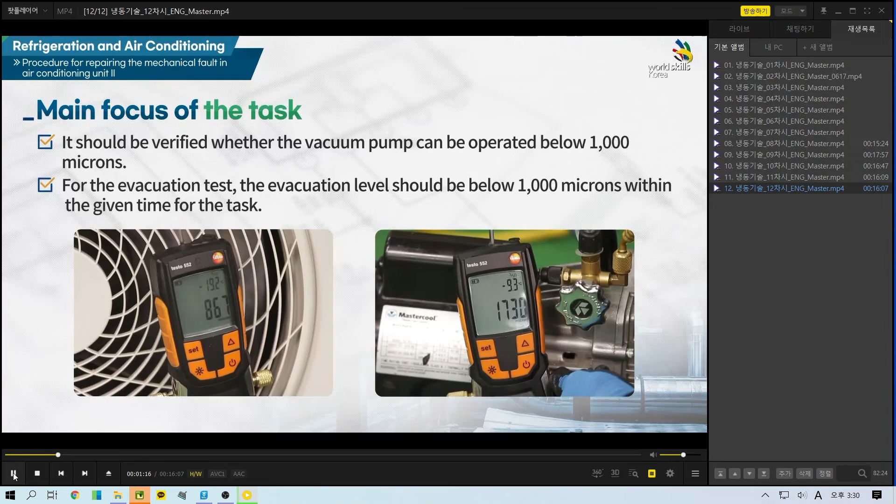Fifth, it should be verified whether the vacuum pump can operate below 1,000 microns. Sixth, for the evacuation test, the evacuation level should be below 1,000 microns within the given time for the task. Seventh, if the vacuum pressure does not go below 1,000 microns, keep conducting the evacuation task until it reaches the desired state. Eighth, the vacuum gauge should be installed as far away from the vacuum pump as possible.

Ninth, the manifold gauge must be adjusted to 0 before use. 10th, in the case of mixed refrigerant, the liquid type must be charged with the liquid service valve or liquid receiver on the high pressure side, as much as the amount of refrigerant to be charged. 11th, when supplementing refrigerant, it should be charged as liquid type through the low pressure side. 12th, when refilling refrigerant, inject a small amount slowly at intervals to avoid liquid compression.

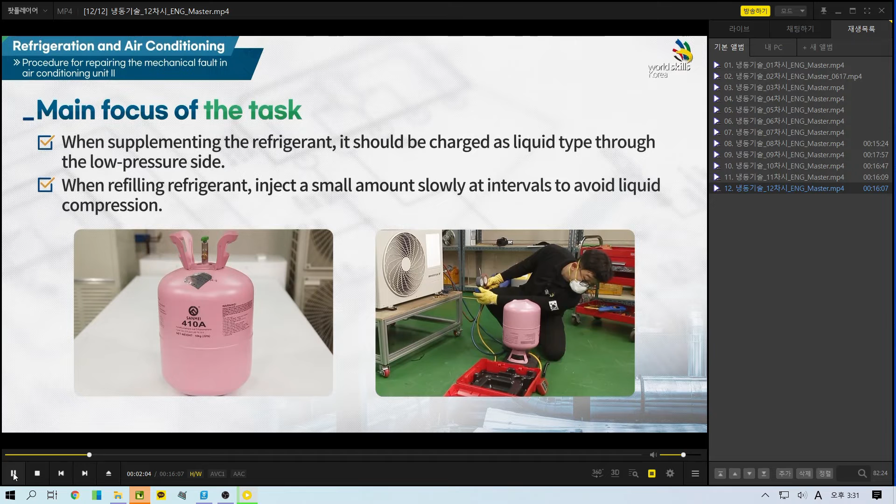13th, the loss of refrigerant during manifold gauge removal and non-condensing gas purge shall be minimal. 14th, when injecting refrigerant, all fastening parts, such as manifold gauges, shall be inspected for leakage with a gas detector after tightening and before charging refrigerant. 15th, after completing the refrigerant charging, the leakage test should be conducted on the refrigerant cylinder.

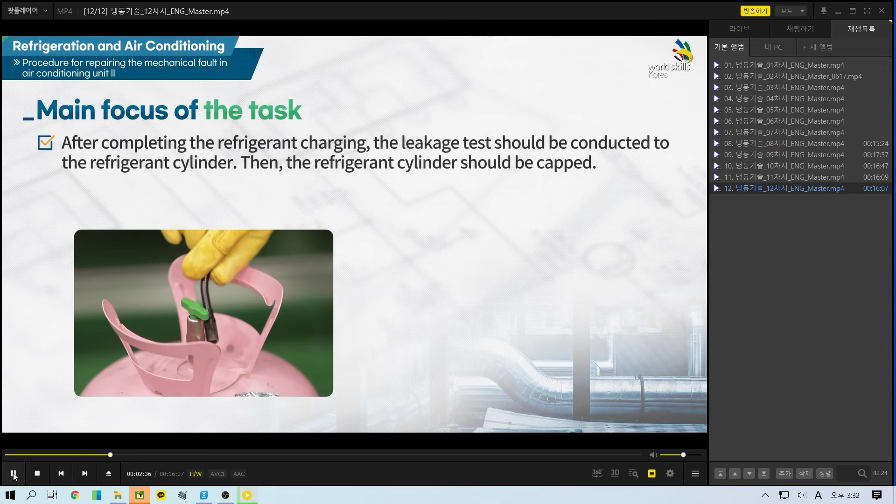Then, the refrigerant cylinder should be capped. 16th, in the case of air conditioners, the amount of refrigerant shall be injected according to the manufacturer's manual, and the normal refrigerator shall be checked with the sight glass for the appropriate amount of refrigerant. Please check the preparations and tools for this training.

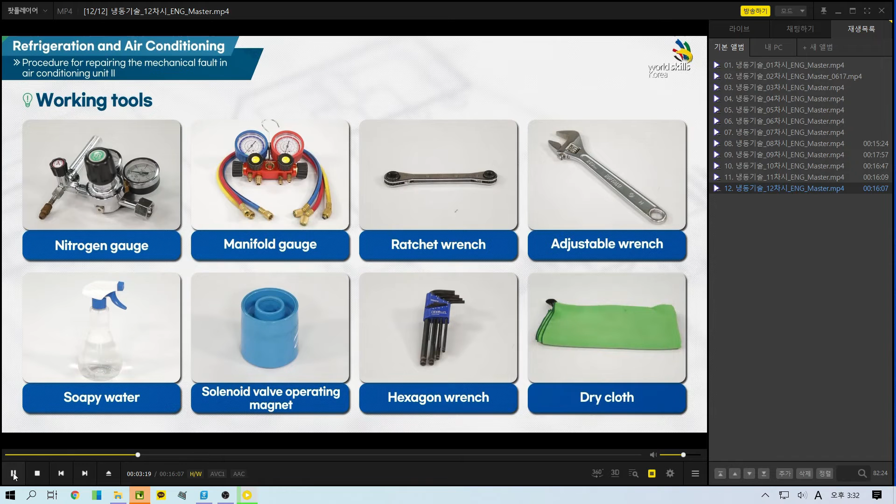These are precautions. First, be cautious of safety because the pressure test uses high pressure. Second, the pressure test shall not exceed the maximum pressure in the specifications of the manufactured equipment. Third, make sure to conduct the leakage test before and after nitrogen pressurization. Fourth, when discharging nitrogen gas, drain it slowly at low pressure and hold the hose end firmly.

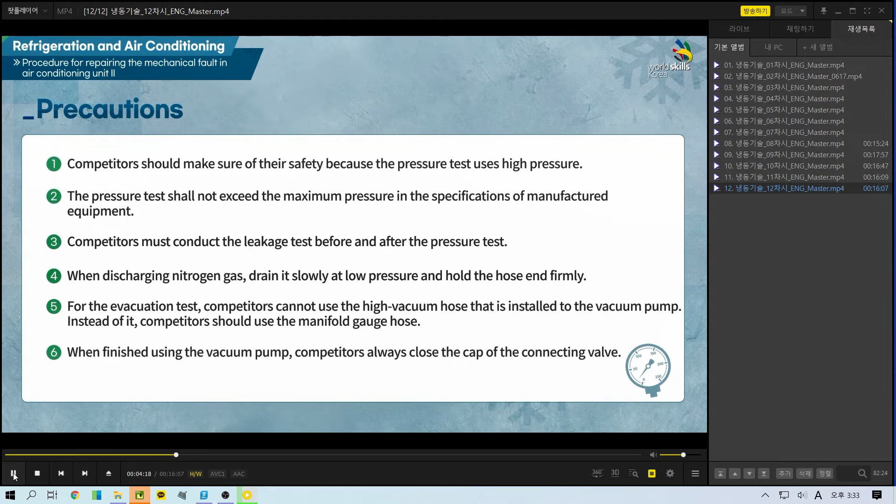Fifth, for the evacuation test, do not use the high vacuum hose that is installed to the vacuum pump; instead, use the manifold gauge hose. Sixth, when finishing using the vacuum pump, always close the cap of the connecting valve. Seventh, to maintain the performance of the vacuum pump and extend its life, the method of use and management proposed by the manufacturer shall be followed.

Eighth, be careful not to mix non-condensing gas when injecting refrigerant. Ninth, when handling refrigerants, be careful about safety accidents. 10th, make sure not to get burnt from the low temperature of the refrigerant. 11th, make sure to wear safety gear such as safety goggles, long-sleeved clothes, and leather gloves.

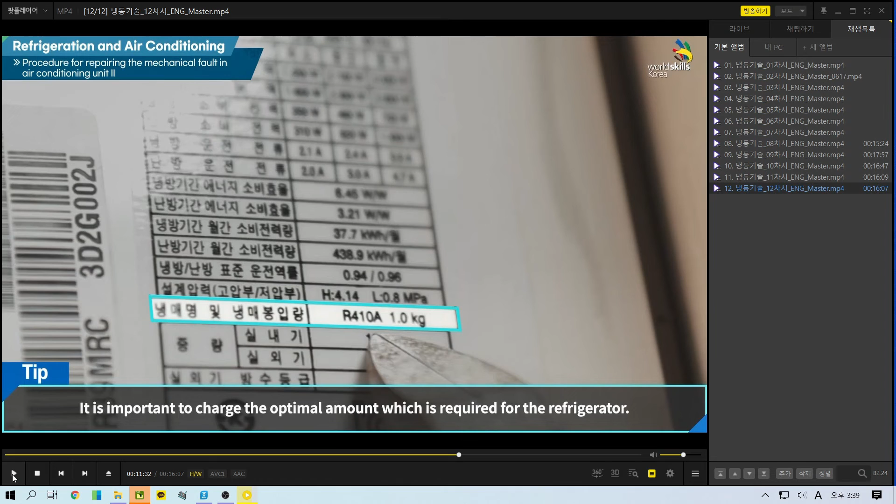As I just mentioned, if there is a sight glass on the unit or system, you can recharge the refrigerant until you cannot see bubbles on the sight glass. Next, if there is no sight glass on the system, such as an air conditioning unit, you recharge according to the specified amount on the equipment. But there is some problem when there is no sight glass and no specified amount from the manufacturer.